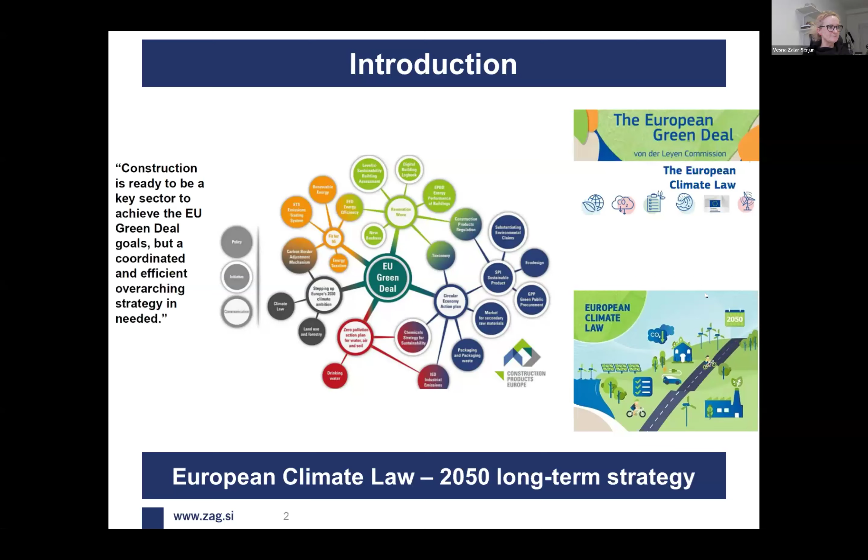There is an industrial carbon management strategy on how to achieve homogeneous deployment of carbon capture and storage. The goal is to establish a single market for CO₂ transport and storage services through Europe by 2030, to support carbon neutral industry and the emerging carbon removal industries through different technologies, such as carbon utilization and carbon capture storage.

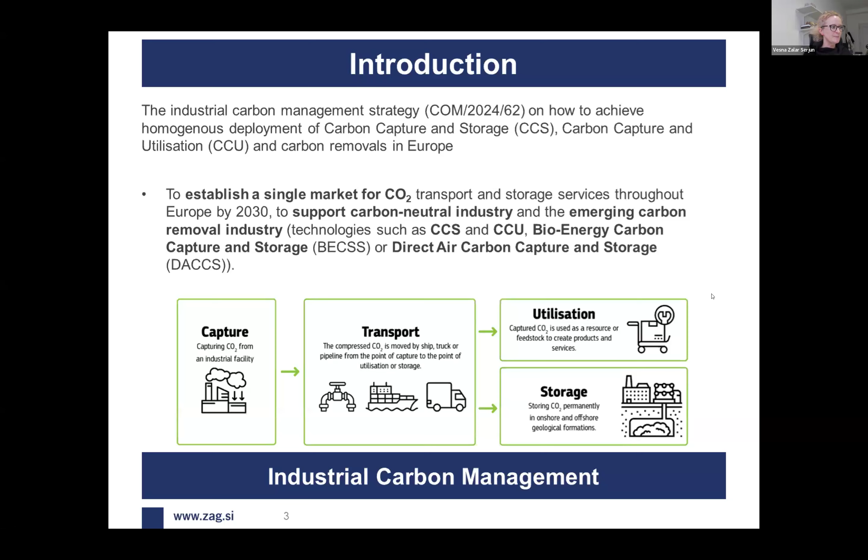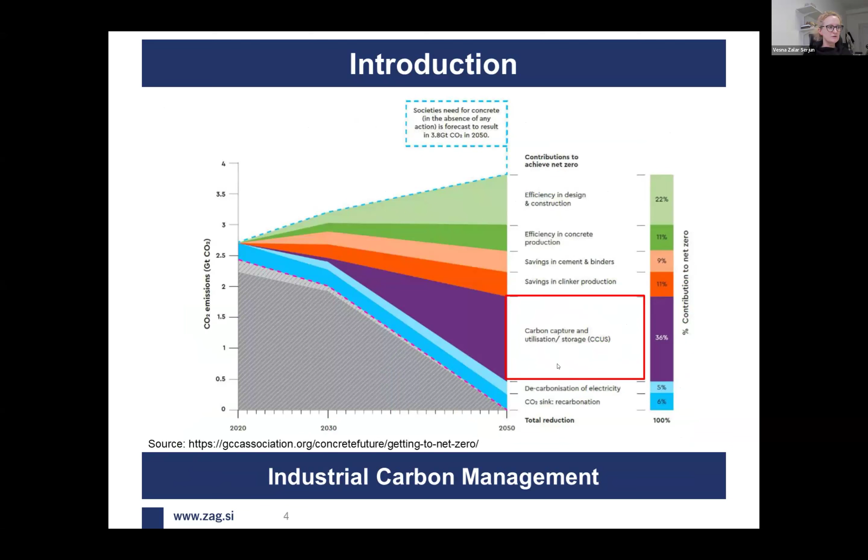As is clear here, carbon capture, utilization and storage contributes on a larger scale to net zero. This is one thing that is very promising in order to achieve those goals.

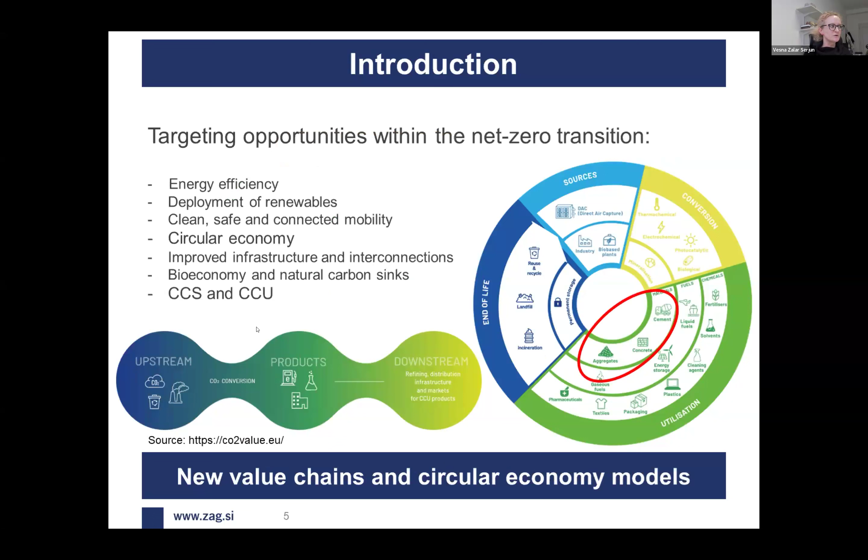Another approach is using carbonation as a strategy, which may open new chains in the circular economy model. If we use cement, concrete, and aggregates, the construction materials, and upstream the CO₂ sources through CO₂ conversion into byproducts, this improves the circular economy and gives added value to carbon capture.

The ideal system for the mineral carbonation of coal ash is defined here in this picture, taken from the literature assigned below. The ideal system is to use flue gases directly from their sources, and to use relatively low calcium fly ashes.

These are the ashes that cannot be used as supplementary cementitious materials. The further step would be direct carbonation using either semi-, or better regarding effectiveness, direct aqueous carbonation. In this way, the use of this material in construction products and earthworks was already shown. At least there is a path, but we have to achieve it at larger degrees, larger scales.

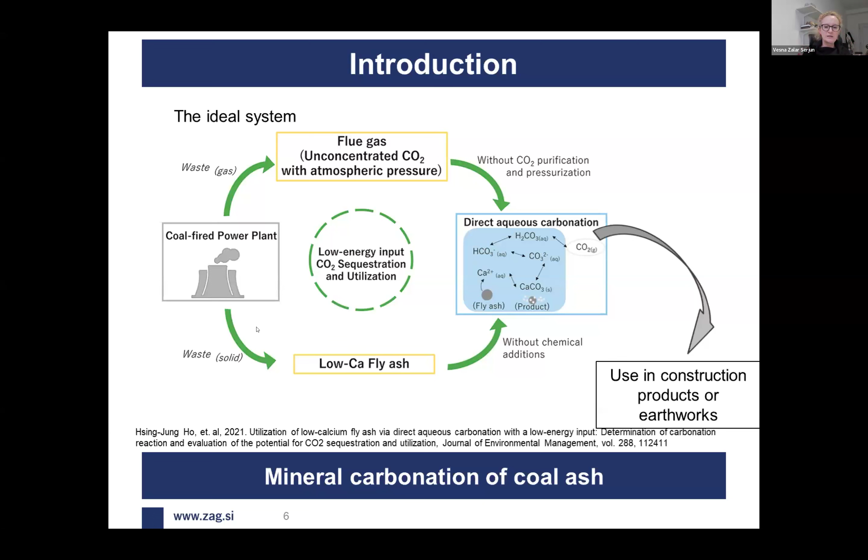Ashes, fly ashes, coal ashes, all ashes, as an industrial byproduct, are described as one of the most complex anthropogenic materials. It is also described that globally it is the 5th largest raw material source.

But we have to be aware that the term 'ash' is a generic name, because it incorporates all the different material produced during incineration using different processes, different input materials, different handling on the fields, on landfills, different ways of transportation, etc. So it is not one material - they differ from one another to quite a large degree.

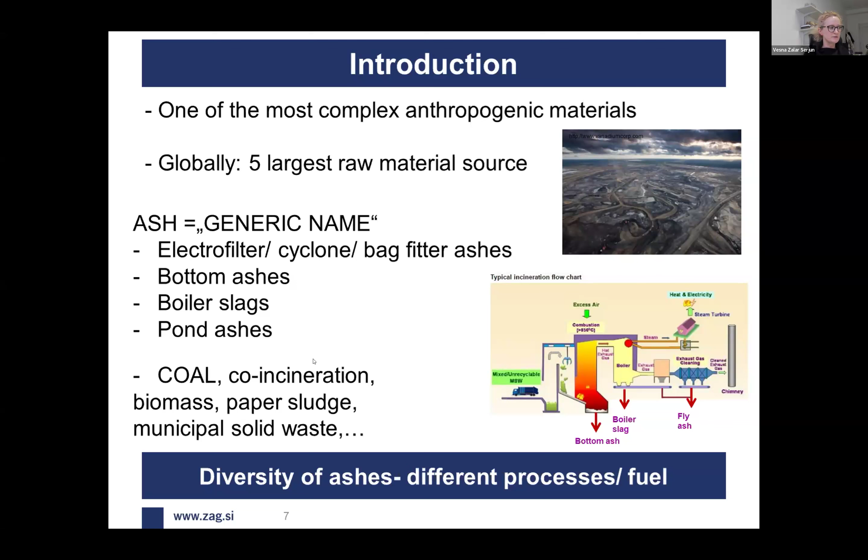We can name them according to the input material which is combusted, such as coal ash or co-incineration ash, or usually by the procedure during which it is collected - for example, electrostatic precipitator ash, cyclone ashes, bottom ashes, and so on. The thing is, we have to be aware that those materials, even though they have the same name, can differ from one another to quite a large degree.

Regarding the use of fossil fuels, it is a fact that we are trying to avoid this as much as possible, and there is a strong strategy to try to reduce it or not use it at all. But ashes definitely will be the waste byproduct that will increase in quantity even in the future.

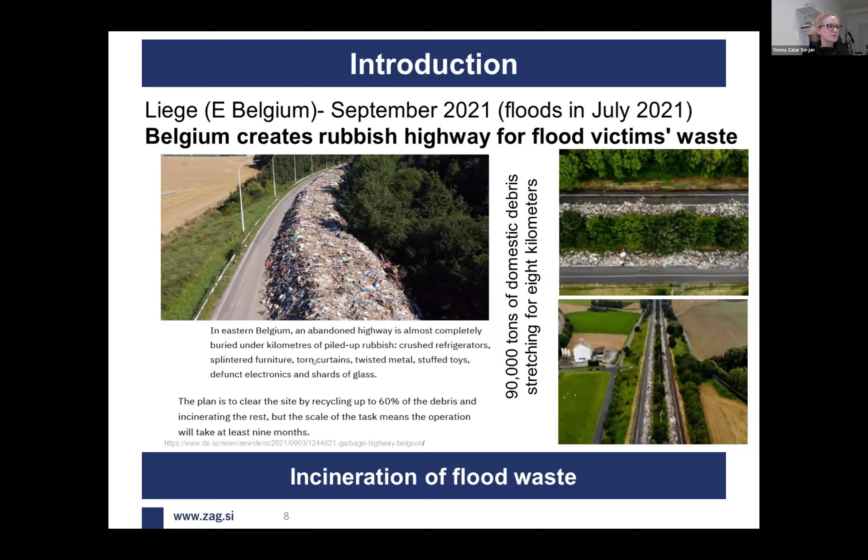Here is one example regarding the incineration of solid waste - for instance, because of climate change and the following catastrophic flood events, huge quantities are produced. Here is an example from Belgium in September, where 90,000 tons of domestic debris were collected along 8 kilometers of highways. 60% of that debris was recycled, but the rest was incinerated. Again in Germany, flooding - this shows that the quantities of this material are going to be higher and higher in the future.

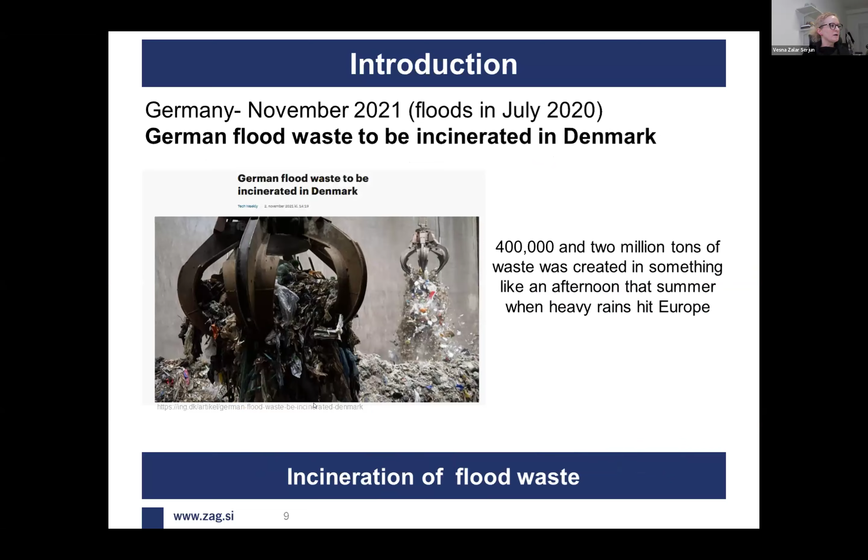If we go one step back, there are already some technical specifications and standards defining how specific ash could be used, and what the specifics of those ashes are for specific applications. This is especially well done for supplementary cementitious materials, road structures, earthworks and different technical specifications. But the thing is, they usually describe coal ash, with really rare exceptions for other types of ashes.

But there were some analytical procedures and steps done which proved that this material can be valuable if it is used the right way, by using the right steps and for the right applications, of course.

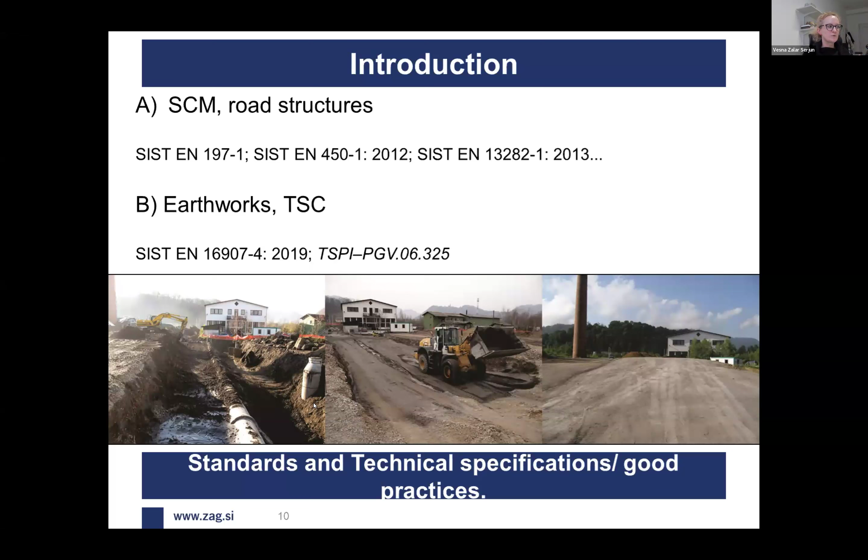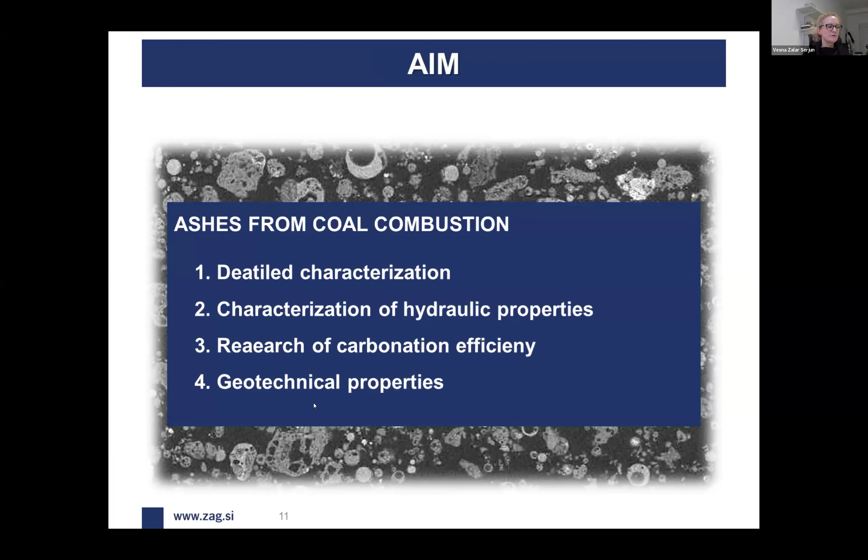So the aim of today's webinar is to speak about different ashes from coal combustion, their characterization, the characterization of their hydraulic properties, which is a very important characteristic. The third step is a research of carbonation efficiency, and at the end, some perspectives or results on the geotechnical properties of the composites prepared from those materials.

So 5 different ashes were used, 4 of them from Slovenia and 1 from a neighboring country. FA1 was collected fresh, directly from the production. FA1 pond was collected from the landfill. FA2 was collected from the summer regime, FA2 winter from the winter regime, and FA3 is collected from the neighboring country. Although they are all specified as fly ashes, the FA2 samples are basically co-combustion samples because during incineration they use some wood chips, and the quantity of wood chips used is larger in winter because they increase the calorific values.

So here in the first line you can see the visualization, and here more deeper insights into their microstructure appearance. There are different colors because the moisture content is different. Also, in the FA2 samples, it is basically not purely fly ash, but 9% of the bulk volume is composed of bottom ash, because this is the standard procedure during collection after production.

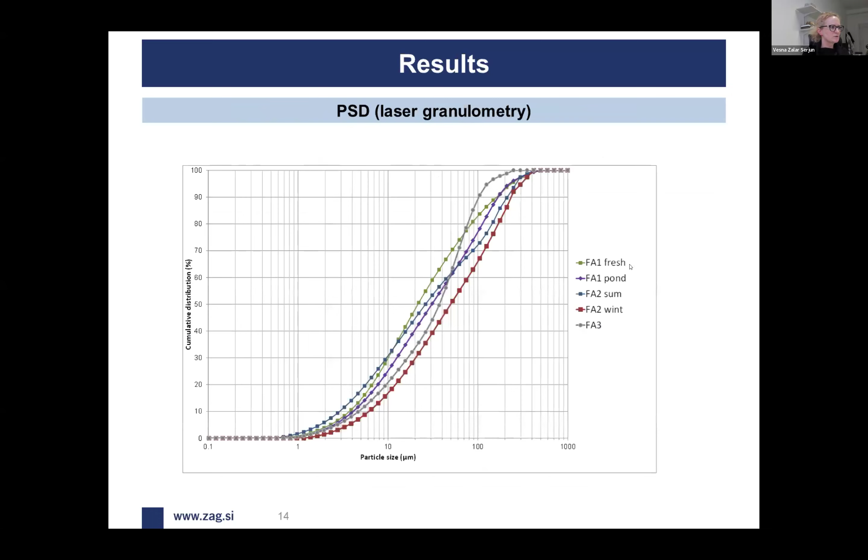Grain density doesn't diverge between different samples really, but specific surface also shows the highest values for the FA2 ashes, which we will see also later, or we can see it here. It's shown in the microstructural features from the microscopy. They contain different leftovers from the combustion of organic material.

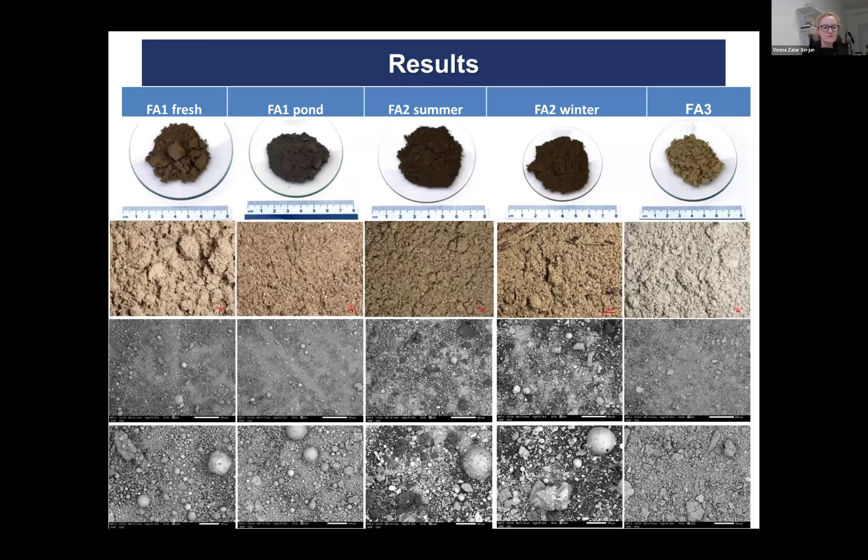One step further, we checked the pH and conductivity of the leachates of those ashes, and the pH is relatively high again in the FA2 ones, while the conductivity is the highest in the FA3.

Bulk chemical composition performed by XRF showed that our investigated ashes are located here in this triangle. This triangle is from the article on Emerging Supplementary Cementitious Materials. The thing is, those ranges show the location of calcareous coal fly ashes and siliceous fly ashes. Our ashes showed a bit different chemical composition, especially FA2, which are moved more toward alkaline elements. So FA1, and FA3 are somehow more siliceous, or at least aluminum-ferrous in those directions.

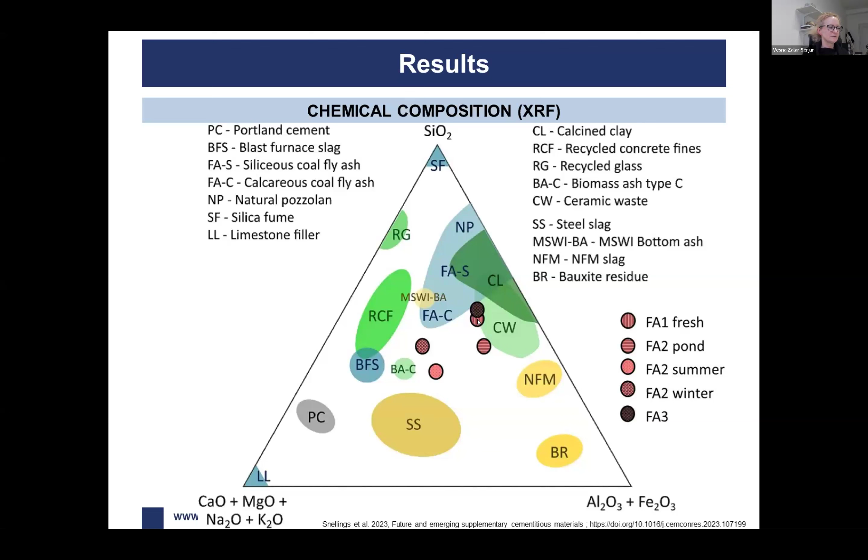Next step was detailed mineralogical or phase composition. We know that at least coal ashes are composed of quite a large fraction of amorphous material. The amorphous phase is the phase which I can say is responsible for the pozzolanic, or let me say latent hydraulic activity, but of course the composition of amorphous phases also differs between each other.

Anyhow, overall, the largest quantity of amorphous material in the investigated ashes is in the FA1 ashes, so in the fresh and the pond one, while in FA2, from summer and winter regime, this quantity is quite smaller. FA3 is somewhere between FA1 and FA2. The other thing is the presence of quartz, which is an inert mineral phase if we are talking about pozzolanic latent hydraulic activity - it is most evident in FA3, while in FA1 its quantity is relatively small.

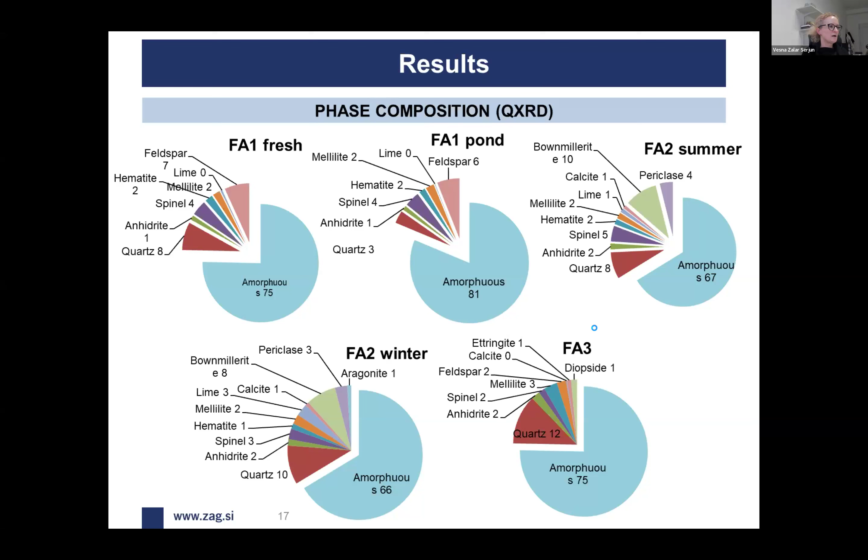Okay, sorry, something is jumping.

So at this step, we are aware that there are some phases that could potentially react only with water. We tried to define latent hydraulic activity of those ashes, meaning adding the material, mixing it only with water without any additional additive which would increase this reaction. So we made pastes with each ash, with two different water to ash ratios: the first one was 1:1, and the other one was 2:1.

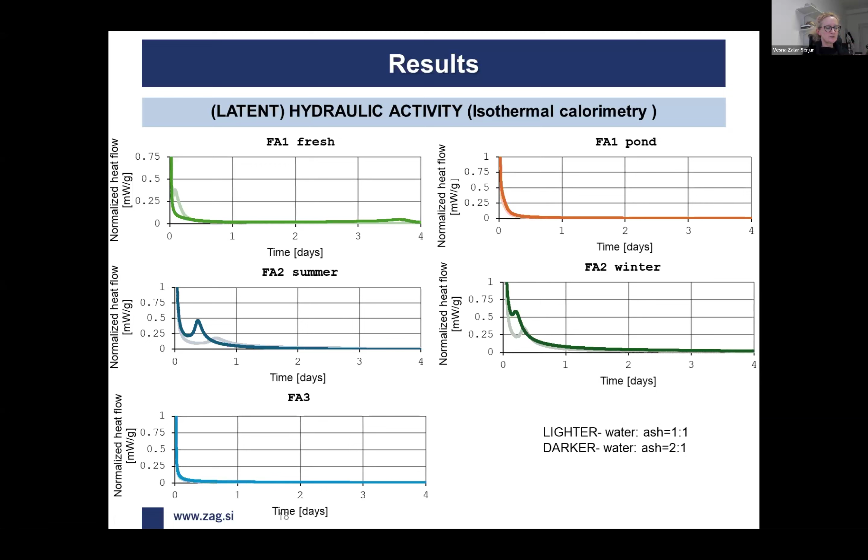One step further then was to check the mineralogy of those pastes. We chose Fa1 fresh because we saw that the pond one didn't react. We used Fa2 winter because the degree of heat release was the highest. And for reference, we also checked Fa3 because nothing was happening there.

So we checked the composition of pastes with water to ash ratio 1:1 during different time intervals, from 2 to 180 days. Here you can clearly see that some hydration products were formed as the time interval increased. In the first case, ettringite and monocarboaluminate. In Fa2 winter, which showed the largest heat release, ettringite is also formed, along with hydrocalumite, and to a smaller degree, monocarboaluminate. Those are all the so-called AFm phases, which represent the typical hydration products of cement hydration.

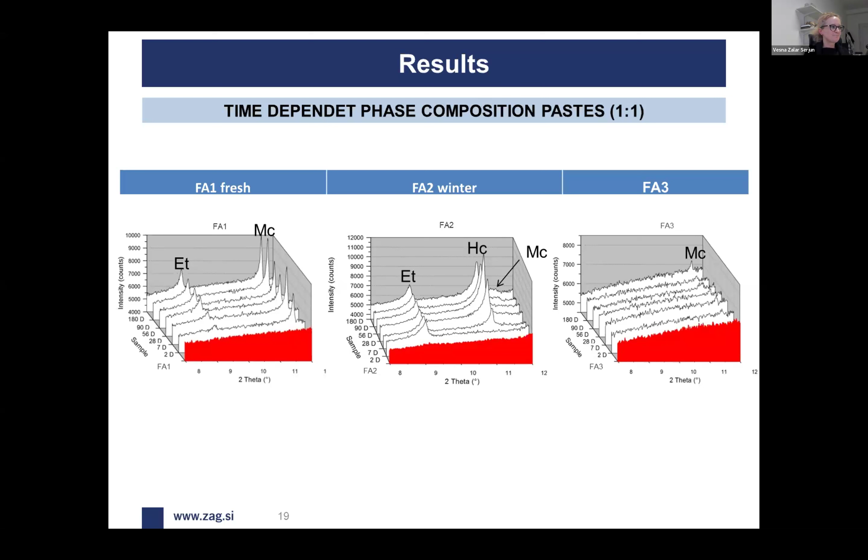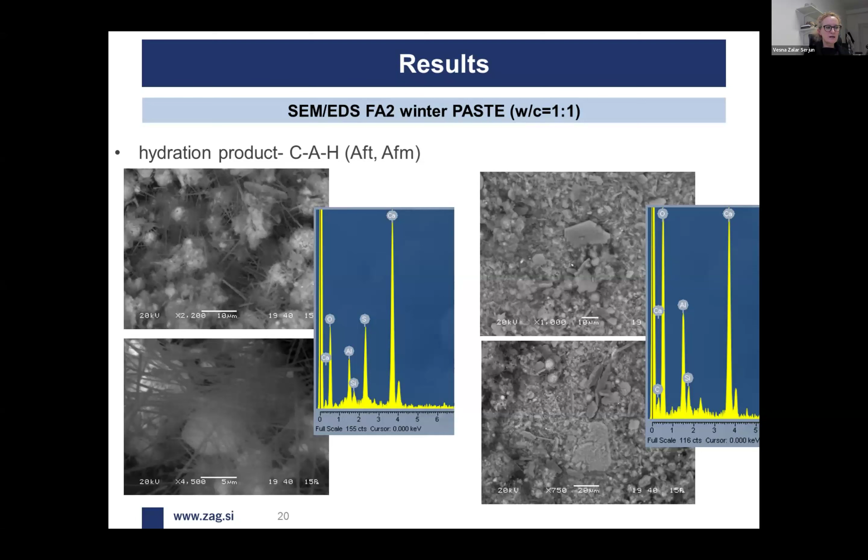Those hydration products can be easily and nicely seen also on the surface of those pastes. Electron microscopy showed the presence of needle-like ettringite type hydration products, and the EDS confirmed the appearance of this ettringite phase. On the other hand, we also confirmed the presence of calcium aluminates, like the platy ones I was talking about, representing the hemicarboaluminates and monocarboaluminates.

Till now, we tried just to check either the material reacts with water or not. But at further steps, we tried to use procedures prescribed in different standards. For hydraulic activity, only the standard for cementitious materials is prescribed, so we checked this too, but we have to keep in mind those systems are not completely the same, because you are exchanging 20%, 25% of fly ash with cement in order to prepare a mortar, standard mortar bars.

Anyhow, the results gave us some clue about how the material could react if we used water and put an additional activator inside, such as cement or pure lime, in order to increase the pH and increase the solubility of the amorphous phase.

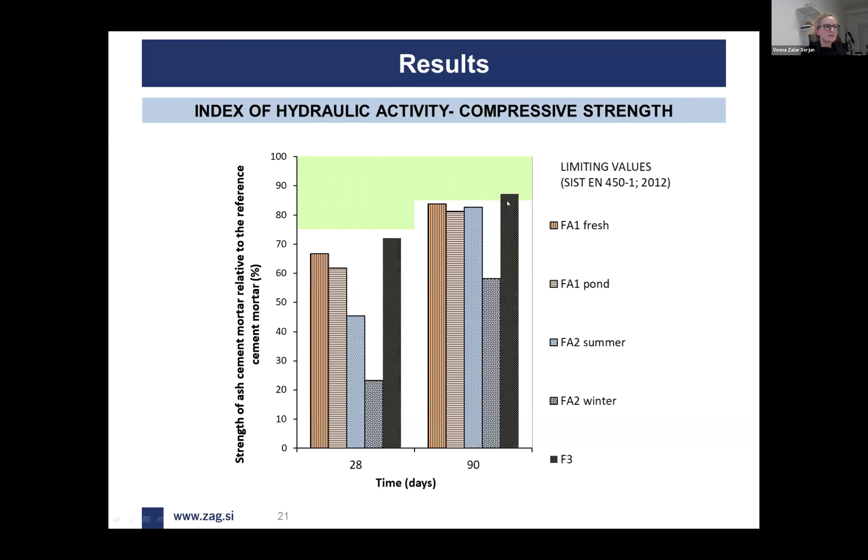Another prescribed procedure for analyzing hydraulic activity is again connected with supplementary cementitious materials. You measure heat evolution by isothermal calorimetry - the so-called R3 test, prescribed by RILEM according to ASTM C1897. Here you measure the heat of hydration in a mix of different chemicals, adding your material of interest.

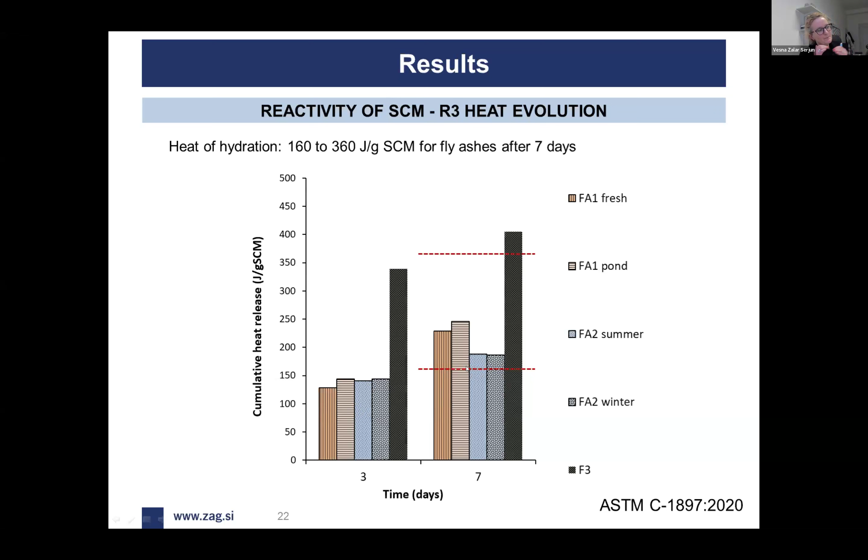But we decided to go further with the Fa2 winter ash. Why so? I already highlighted that it didn't show really good potential in the cementitious systems, but it showed very promising features when used in combination with water.

Combination with water is usually used in geotechnical applications, of course if there is no need for further stabilization or increasing strength. That's why we moved on with defining further characteristics of this ash.

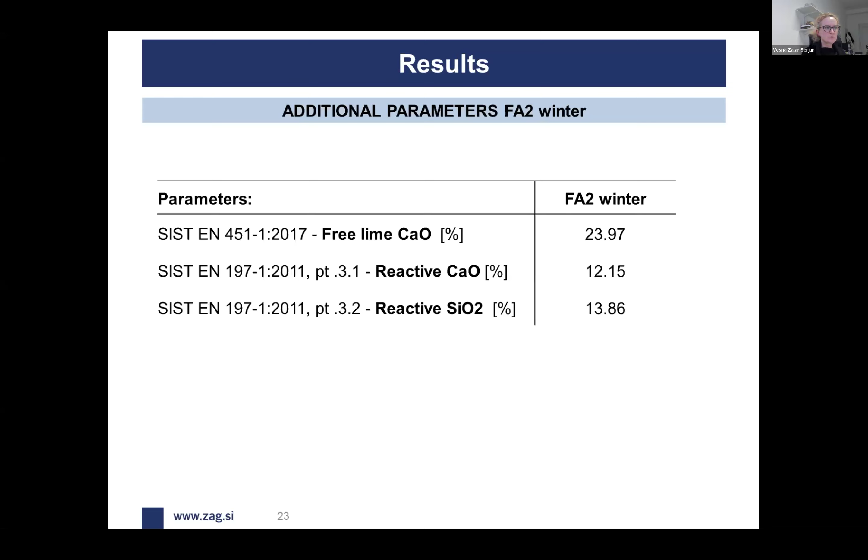Of course, one very important thing when you decide whether some industrial byproduct material can be used or not is environmental impact. So we performed the leaching test according to Slovenian legislation for Fa2 winter, which was chosen for further investigation. The results showed that concentrations of barium and fluorine exceeded the limiting values.

Further step was to prepare the geotechnical composite according to the standard Proctor compaction test and perform the leaching test on the composite prepared from the original ash. The results showed that concentrations of barium and fluorine, which exceeded the limiting values in the raw material, here were defined below the limit.

So the thing is that it's definitely different - we can assign this to different facts, such as hydraulic activity of the ash and, of course, lower permeability of the material when checking the Proctor compaction procedure.

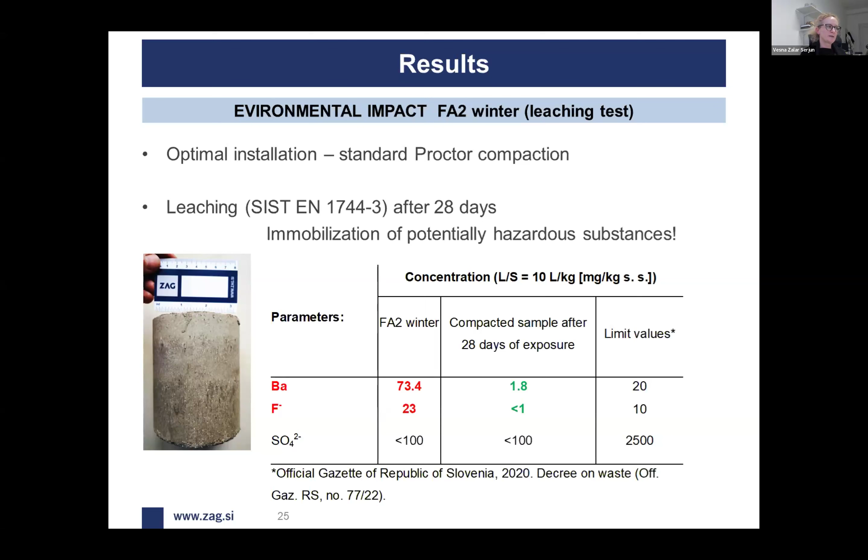Further, we took steps to define the characteristics of this ash in incorporating or sequestering CO₂. We used 3 different exposure conditions: the first was a vacuum bag, as a reference.

The second was a chamber for dry carbonation, where air moisture was only 50%. The third was chosen according to higher moisture content and lower CO₂ content, just to check what influences more - either higher content of CO₂ or higher content of air moisture. Different exposure times were also used.

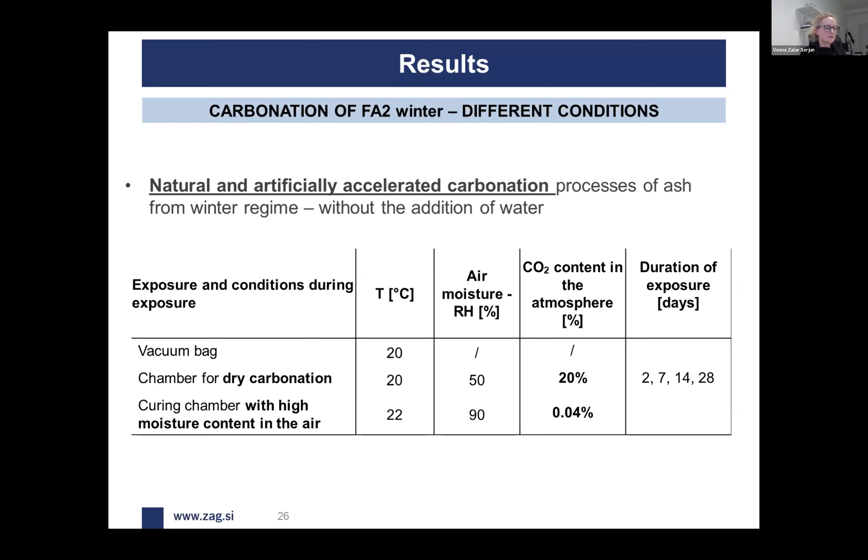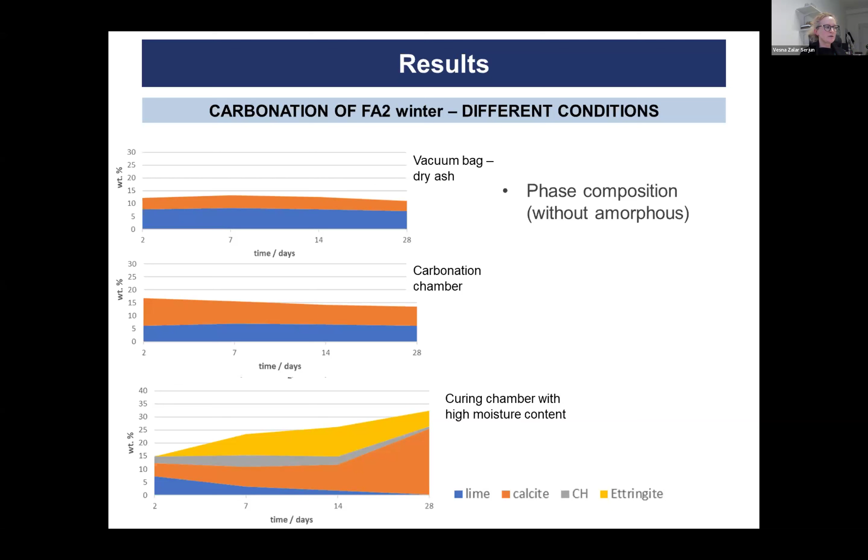The results show that, of course, the curing chamber with high moisture content was the most efficient during carbonation of the material. We can see the depletion of lime, while the quantity of calcite was increased, and also the quantity of portlandite was decreased. On the other hand, some hydration product also formed, which is due to contact with moisture, as we already showed before.

So when we proved that water content is a very important parameter in order to increase the carbonation process, we took a further step of investigating the carbonation mechanism by adding different quantities of water to the ash and using chamber conditions with 50% relative humidity and a high degree of CO₂ concentration. At the first step, we took short time intervals, from half an hour to 24 hours.

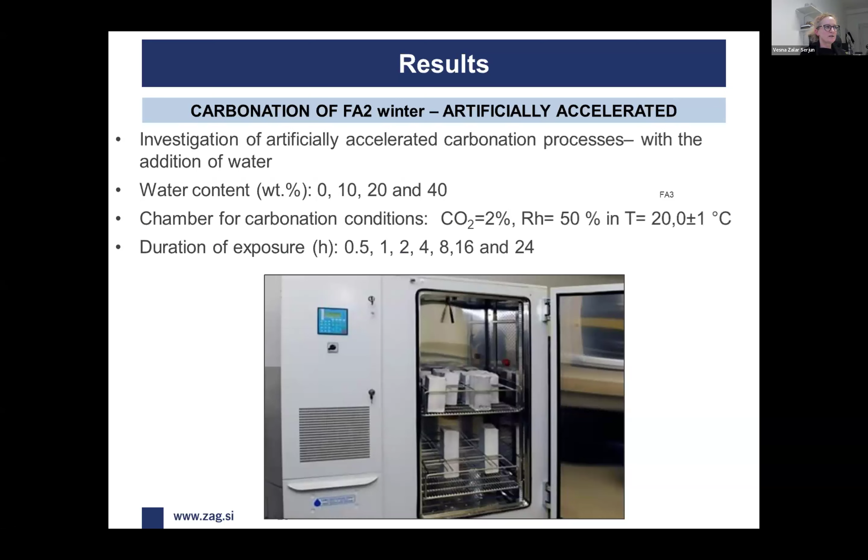It was very obvious that an increase in mass happened after carbonation, and this increase was highest for the sample in which the quantity of water was highest. So the 40% of water added to the material was reflected in the higher increase in mass.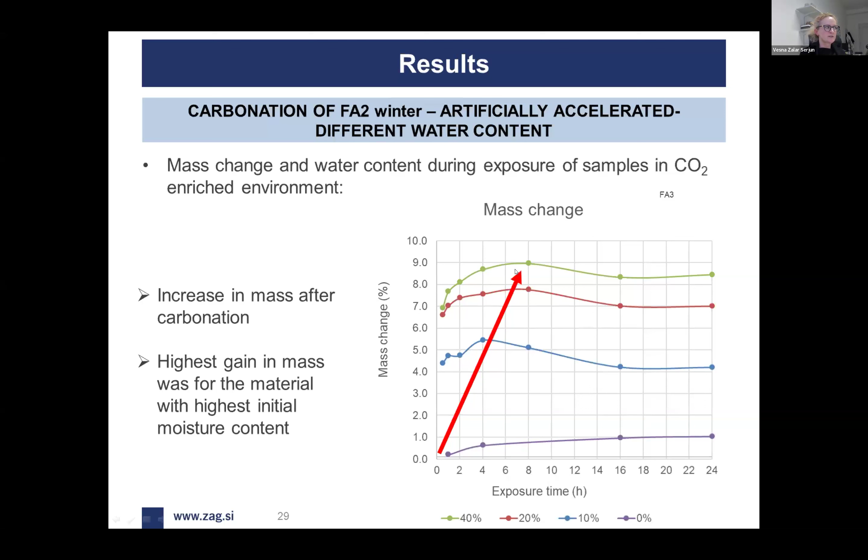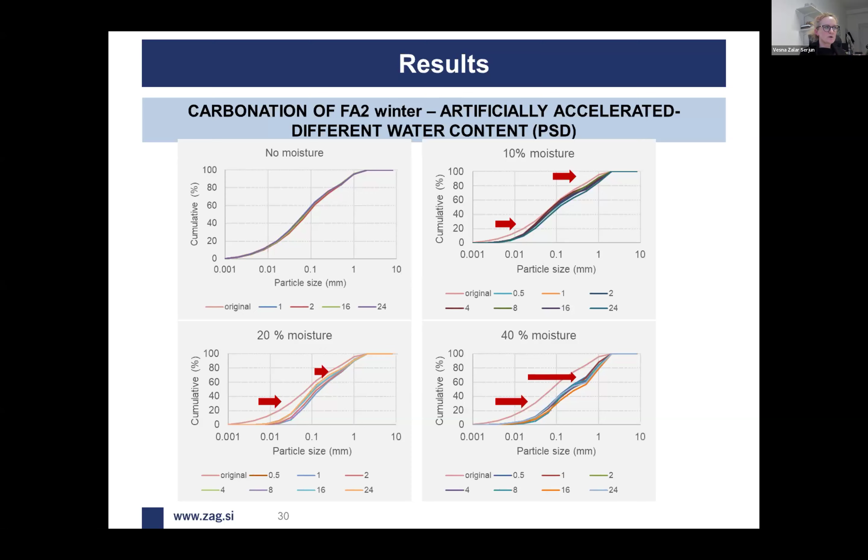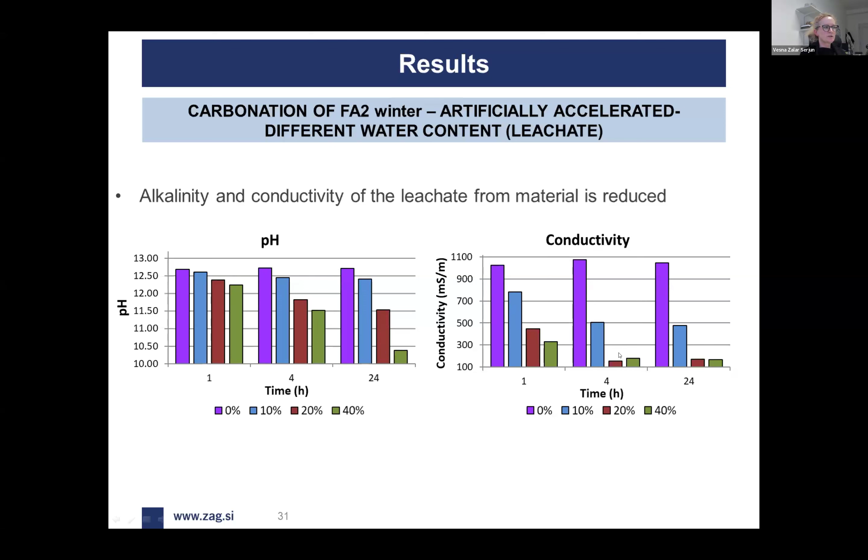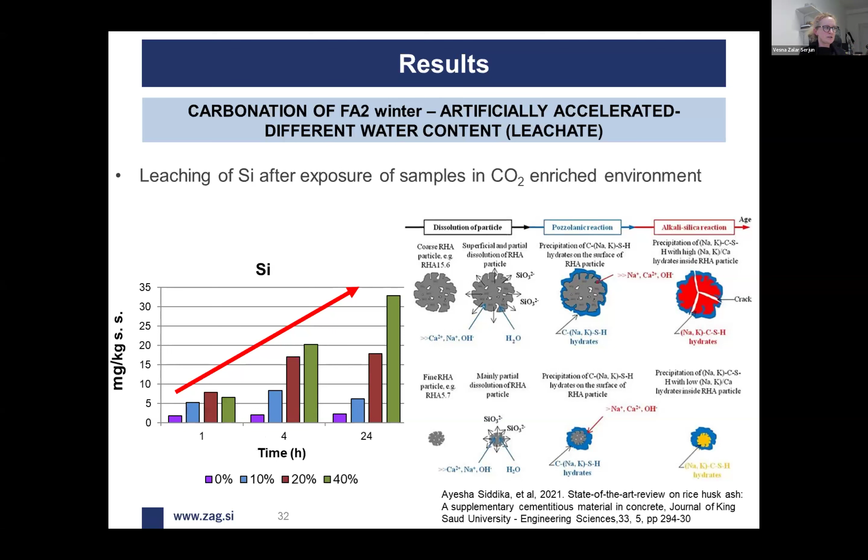Silicon showed the opposite trend to pH, because the concentration of silicon was highest when the highest moisture content was used, which shows at least partial pozzolanic, or let's say hydraulic, activity of this ash. So the dissolution of particles, which is called the pozzolanic reaction, ensures more silicon present in the pore solution, from which hydraulic material can then crystallize.

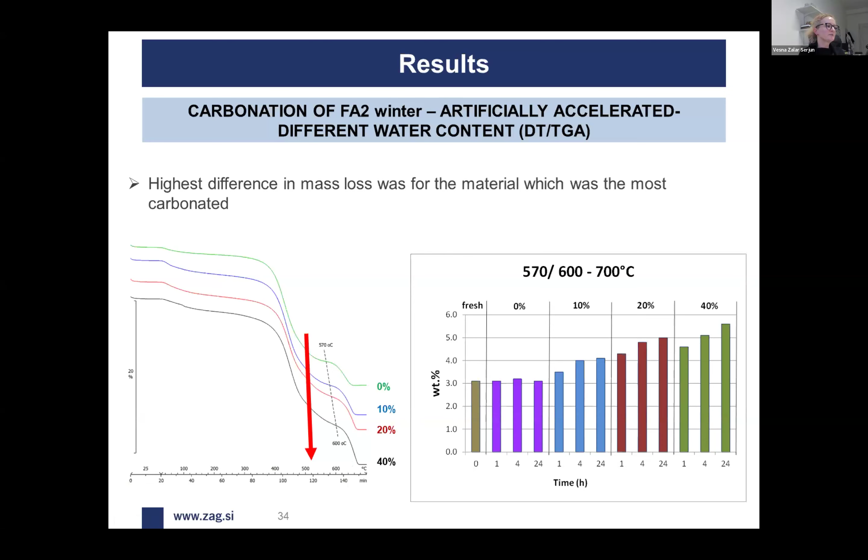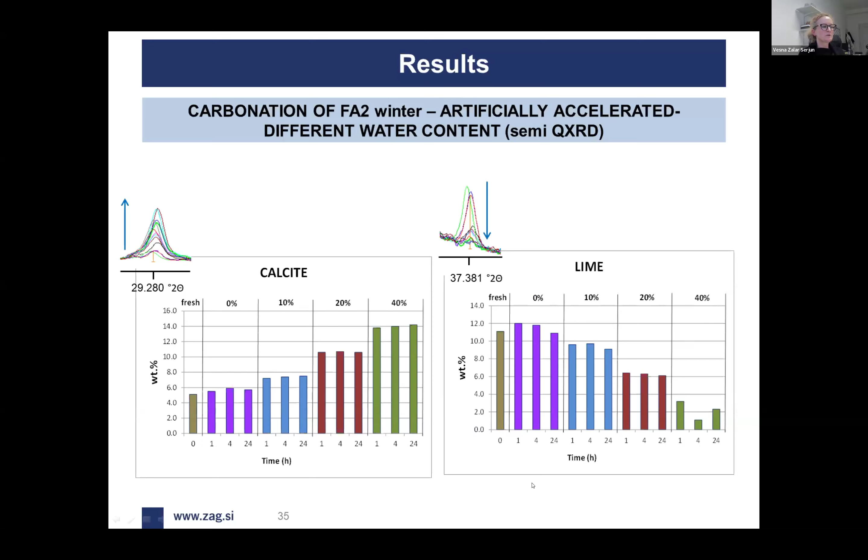While on the other side, of course, calcite was formed on account of the lime and portlandite presence. We can clearly see that the concentration of lime decreases with time and also with water content. Some microscopy features help define the mechanism of carbonation.

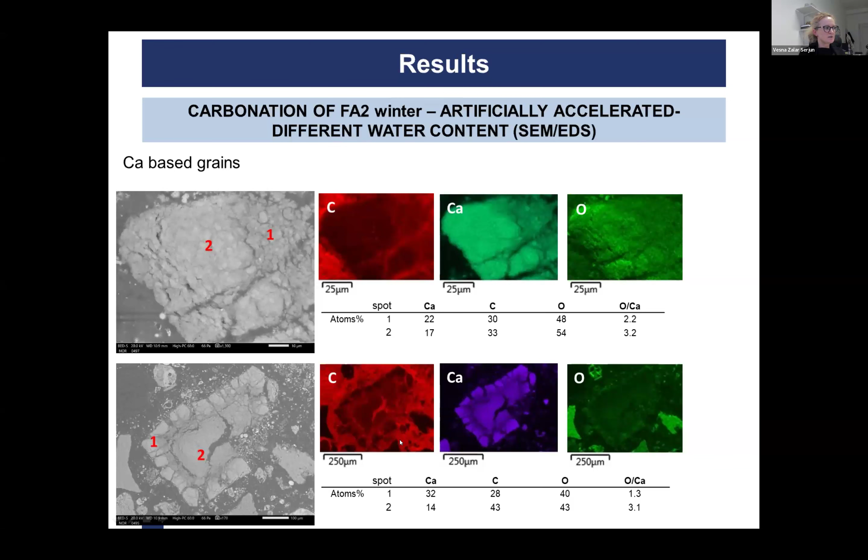Here again we can see an interfacial transition zone between the outside and the grain itself. It shows that this part is still lime, while this inner part has already carbonated to calcium carbonate, to calcite.

Microscopy also shows some smaller details, like how the changes in microstructure during carbonation occurred, and gives us an answer to the question: why can a small amount of lime still be present in the samples at the largest time interval and highest water content?

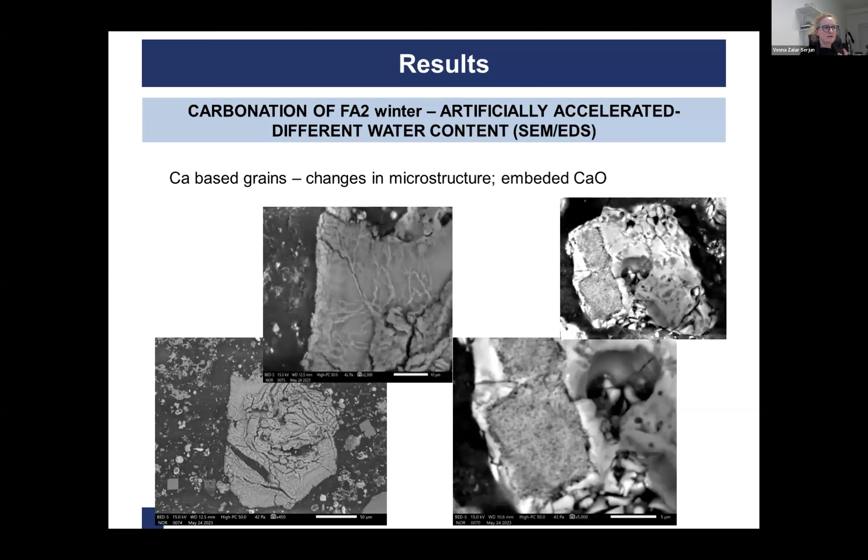Here it is proven that some lime or portlandite is embedded in larger grains. When you prepare samples for XRD, you pulverize them and release those parts which are embedded in larger grains, and that's why we kept getting at least some lime in our material. This resolves our puzzle.

A further step was comparison of heat of hydration from the fresh ash and the one that was most successfully carbonated. Again we see the delayed reaction. This is proof that it incorporates less lime, less portlandite, and also less of some other potentially hydraulic materials or phases. That's why, but still, it does react, at least to a small degree.

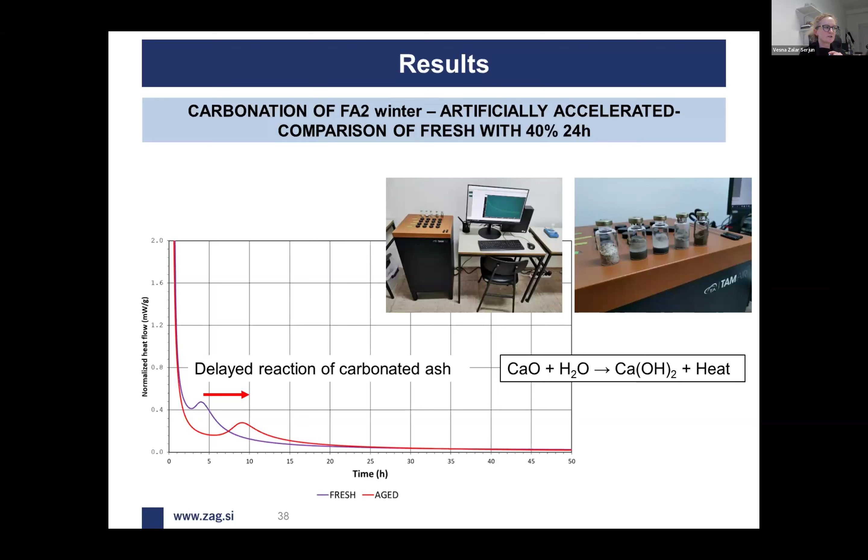So the idea was, if this material will be used for Proctor compaction tests, for the preparation of geotechnical composites, we will still have some benefit from its hydraulic property. So this can only be a positive characteristic.

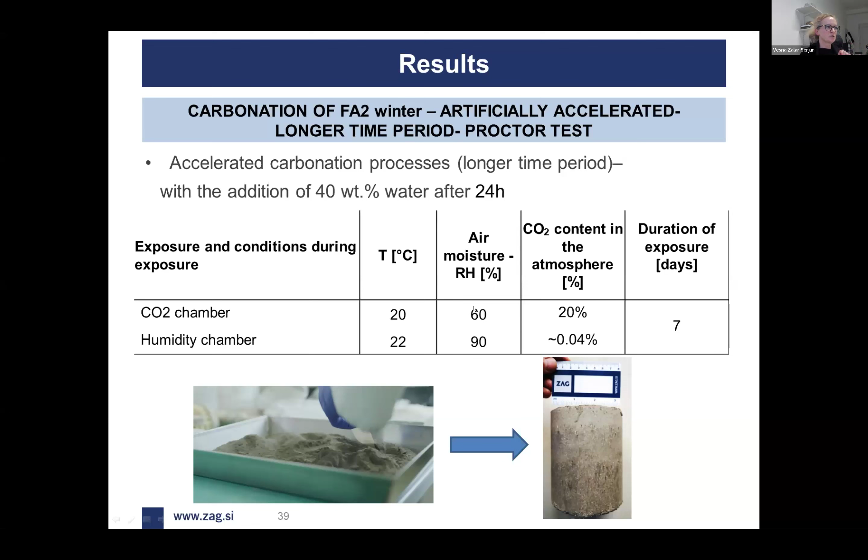This was also the reason to take further steps, which was to check longer time periods and to use the carbonated sample of ash for the preparation of geotechnical composites, and then to follow the mineralogy of those composites. We again used a CO2 chamber and humidity chamber, with higher moisture content combined with lower CO2 concentration, and the CO2 chamber was just the opposite. Duration of exposure was 7 days.

Here is the comparison of fresh ash as collected, after the humidity chamber where it was kept 7 days, and the CO2 chamber where it was also kept 7 days. It can be clearly seen that in the case of the humidity chamber, some hydration products were formed, like ettringite. In the original fresh ash it was not present, but here it was. You can also detect peaks from AFM phases, which also represent hydration products.

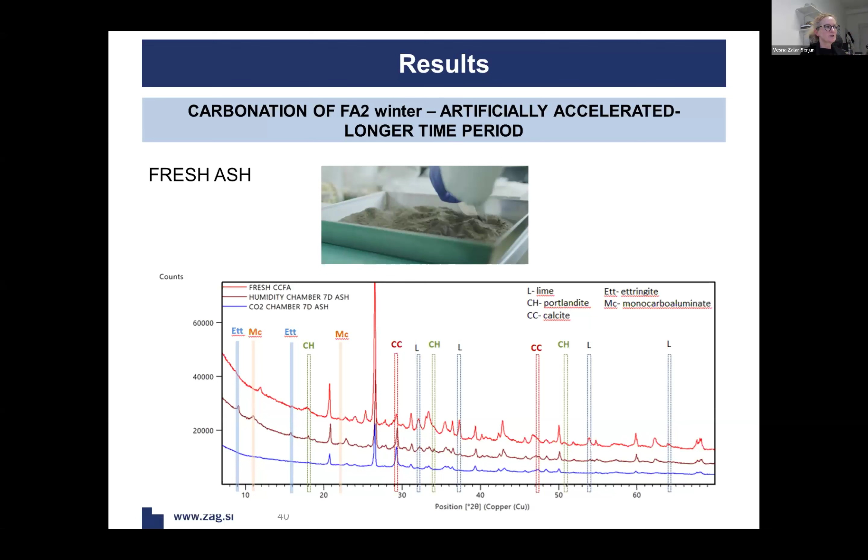We can clearly see the increase in the peak of calcium carbonate, the calcite, and the depletion of lime—here the peak is smaller than in the original one. In contrast, in the CO2 chamber, practically nothing much is happening because of the lack of water content, which was shown earlier in the presentation. This is another confirmation, at the longer time period, after 7 days.

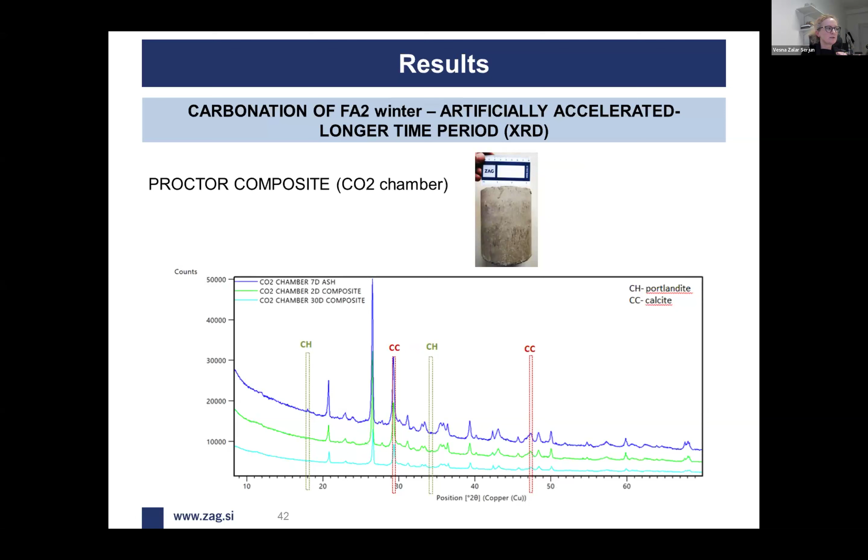But it already sequestered some CO2, so we have two benefits. On the other hand, when checking the CO2 chambers, with lower relative humidity concentrations, again nothing much is happening in the Proctor composite itself, and the results are practically the same as when identifying the raw ash material itself.

So some geotechnical parameters were also defined when using fresh and carbonated ash. There are some differences, and maybe the largest differences are in unconfined compressive strength, where the fresh ash achieved 5.5 megapascals, while carbonated only 0.8.

But somehow, the natural materials used for embankments have unconfined strength like 0.1 to 0.2 up to 1 megapascal. So this is not even such a bad result.

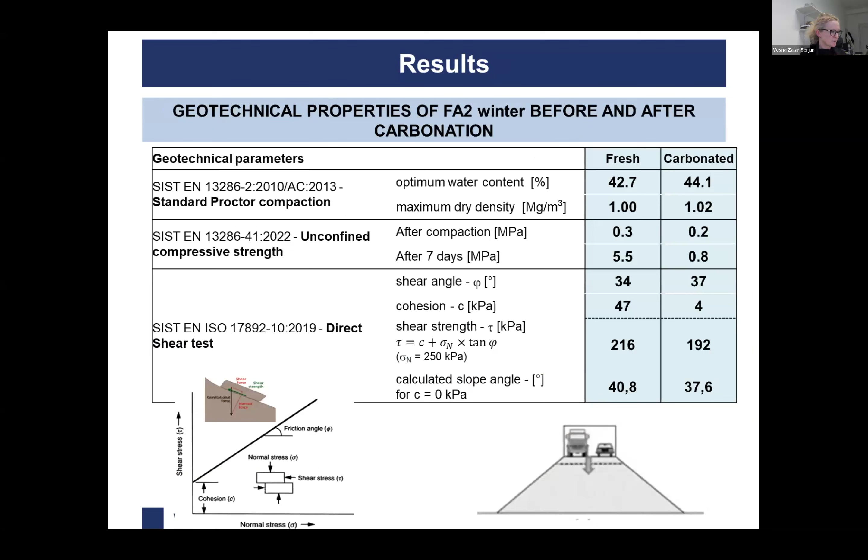As I'm not primarily a person who deals with such geotechnical parameters, I will conclude without going into details. If there are questions, I will be happy to answer them after the discussion with my colleague.

But anyhow, the application of the CO2 treated ash shows potential uses for the purposes of constructing and amending earth structures for different projects, for the rehabilitation and closure of disposal sites or other utilizations, and it can replace the use of natural materials.